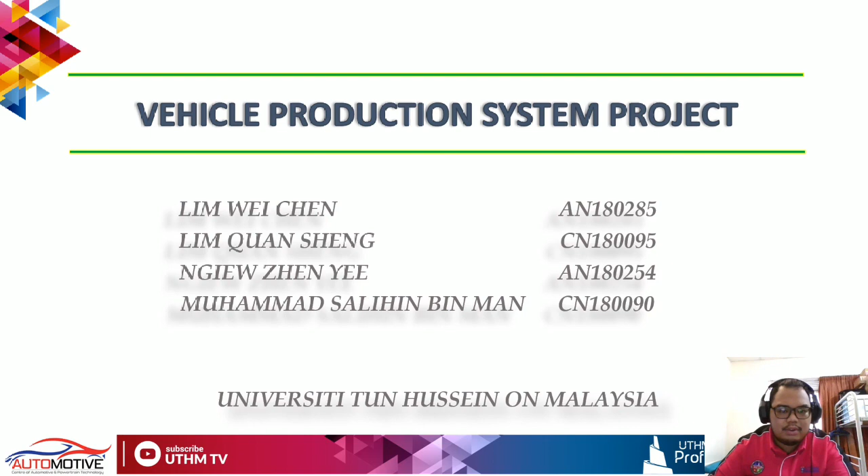The introduction for this project: in the 1960s, European firms began producing completely broken down automobiles after Malaysia won independence in 1957. The Malaysian government began industrial development for the heavy sector, notably the automobile industry, in the 1980s. European and Malaysian Chinese ethnic enterprises dominated the manufacturing sector in Malaysia.

With the New Economic Policy (NEP), which began in 1971, the government aimed to expand the entry of Bumiputra businesses into the industrial sector. Proton was founded as a partnership with a Japanese business in 1983 due to the challenge of integrating automobile production with a local company alone. HICOM contributed 70% of the total capital of 150 million, while Mitsubishi Corporation and Mitsubishi Motor contributed the remaining 30%.

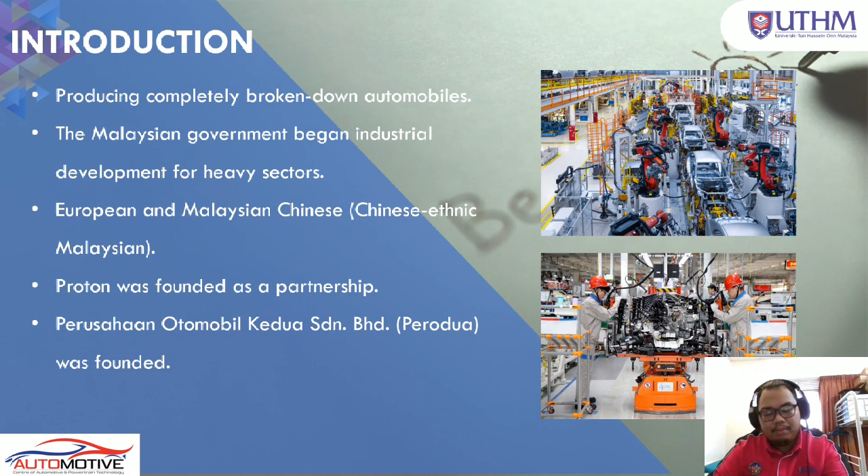Perusahaan Otomobil Kedua Sdn Bhd, or Perodua, was founded in 1993 in response to the IMP, which recommended a new national automobile project. Perodua was a collaborative effort between Daihatsu and the second national automobile manufacturer. Perodua began selling a tiny vehicle based on the Daihatsu Mira model in 1994.

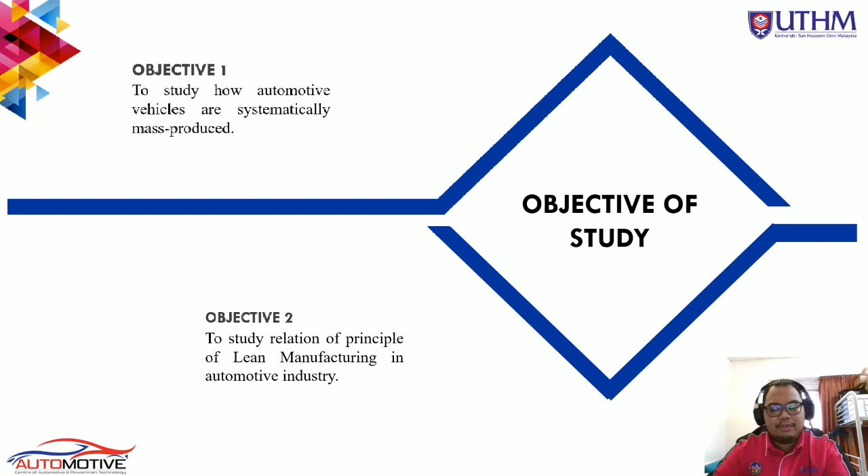The objective of this project is to study how automotive vehicles are systematically mass-produced, and the second objective is to study the relation of the principles of lean manufacturing in the automotive industry.

Next, we move to the problem statement. The importance of the automotive industry taking part in lean implementation is to implement a new management system, lean manufacturing, to improve their performance. As published by past researchers and practitioners, lean manufacturing has been implemented successfully in many large organizations, but there is still less documented evidence of how companies implement it.

The increasing demands from customers who seek high quality products and highly capable business processes has left large organizations no choice but to implement lean manufacturing to cut waste and non-added value, and to improve their quality and production time.

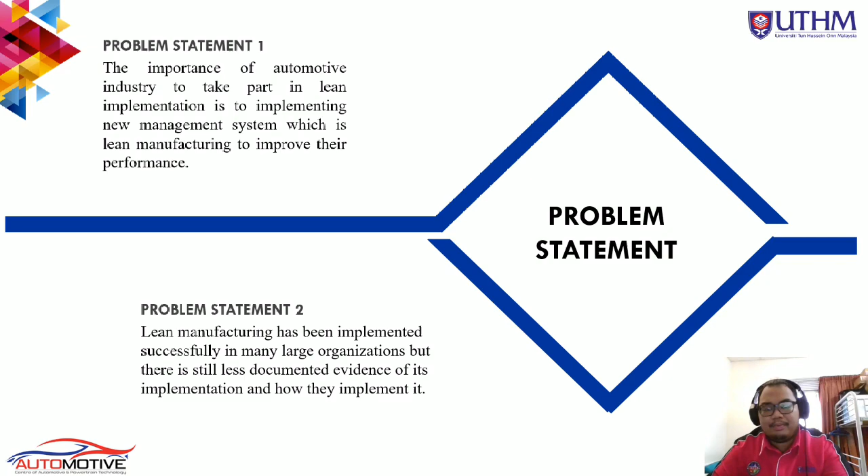In the first part of the literature review chapter, I will introduce what lean manufacturing is. The term 'lean' basically refers to a systematic method designed to minimize waste in manufacturing systems while productivity remains constant.

In the lean principles, it implies the message that waste is anything that doesn't add value that the customer is willing to pay for. Through lean manufacturing, eventually we can get benefits where we're able to reduce operating cost, reduce time, and improve product quality.

As an acknowledgement, there are several types of lean manufacturing techniques. The lean manufacturing techniques I'm going to emphasize in this presentation are Kanban, 5S techniques, Poka-yoke, SMED, TPM, and VSM. So what is Kanban?

The Kanban system is the equipment or items frequently used in the lean manufacturing system to ensure inventory is always kept to a minimum. By using the Kanban method, eventually it will bring benefits to the management, production, and the business of a company.

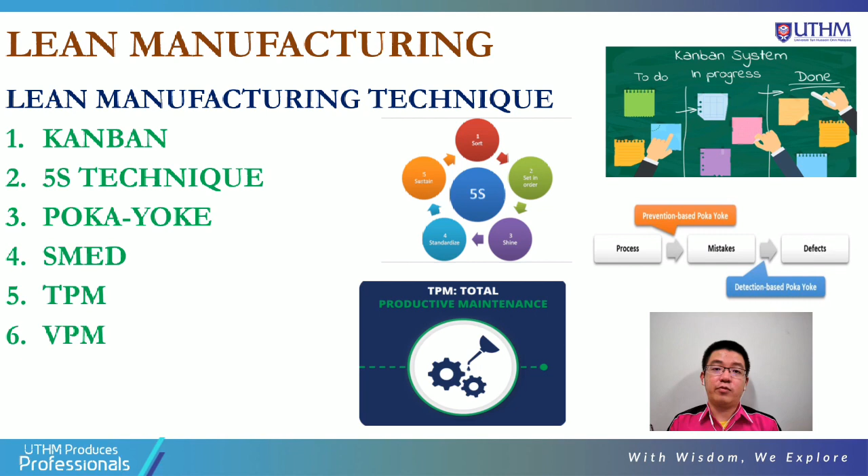One example that could be found in the automotive field which applies the lean manufacturing concept is Toyota. Toyota named it the Toyota Production System, or TPS for short. The concept of TPS is to manage the production lines and ensure production works smoothly.

The lean manufacturing techniques applied in TPS are Jidoka and Just-In-Time. Jidoka is a Japanese term which can be translated as automation with a human touch, a method to quickly identify and correct any issue that leads to faulty production.

The second one is known as just-in-time. Just-in-time refines each production process so that it only produces what is required by the next process in sequence. By applying these two lean manufacturing techniques, Jidoka and just-in-time, the vehicle production can be produced quickly and effectively, achieving a high quality product that fulfills customer requirements.

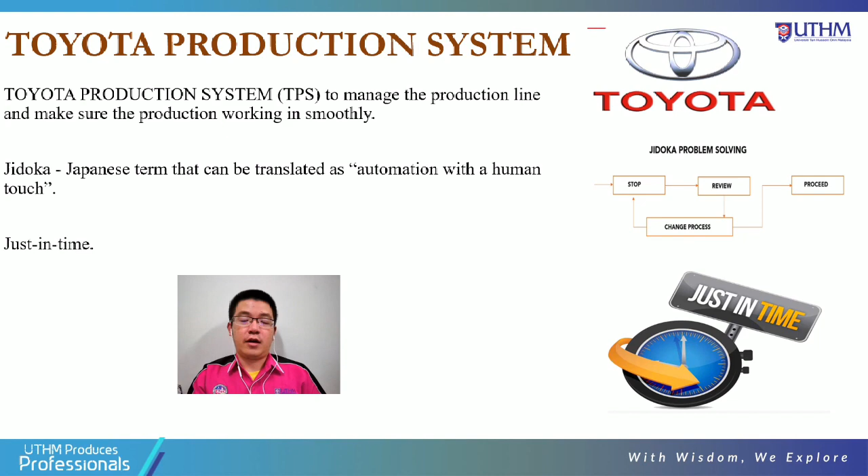First, let me start with the press shop. The press shop is where the car manufacturing process begins. It is a process where sheet metal is blanked into useful shapes through plastic deformation, using a die and a mechanical press.

The stamping engineering activities involve not just production engineering but also the development of necessary tools. Stamping engineering starts with the desired panel shape, given by the designer in a CAD file, as well as the desired panel mechanical characteristics.

Next, the engineer proceeds to material selection, which includes selecting the steel grade, thickness, and heat treatment. Following that are feasibility assessments for each material chosen, which lead to a process plan. After that, finite element simulation and numerical trials are used to create the die surface, followed by actual experimental testing.

Then, successful die designs are built and verified using various prototypes and dimensional validation techniques at the die maker facility and subsequently on the stamping line.

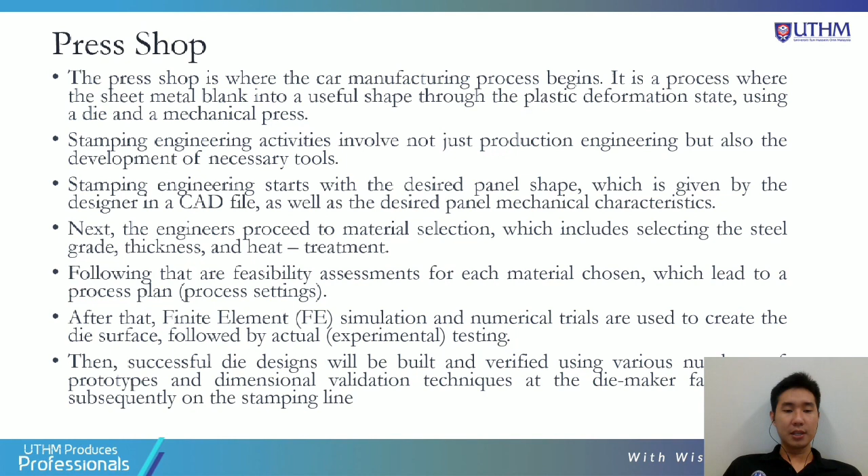The stamping process is divided into three processes. The first process is blanking, which involves a cutting action around a closed shape, the piece retained for future forming. The blank shape is composed of a number of straight and curved line segments. There are several cutting processes involved, such as slitting, shearing, piercing, lancing, trimming, and parting.

The next process is stamping or forming, which includes the first forming operation, drawing operation, and subsequent operations. The last process is the assembly activities, a variety of specialized cells for combining panels to form BiW components, such as joining the door inners and outers.

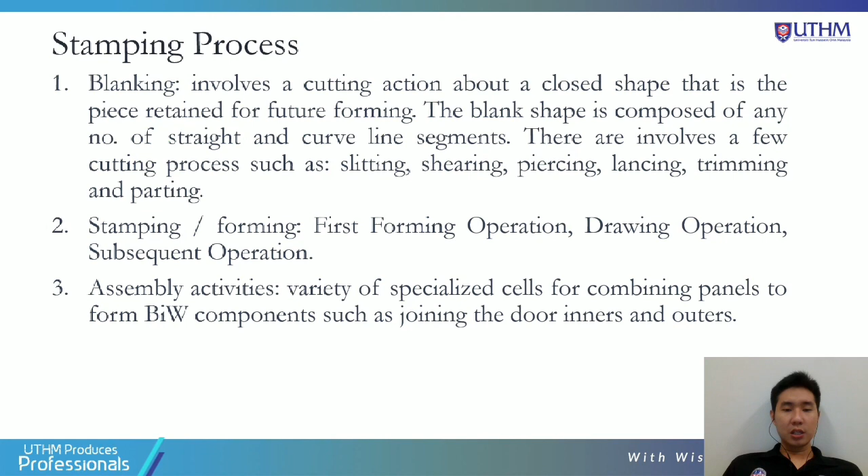For the stamping process, there are two main stamping presses. The first is the mechanical press, which works by converting the energy stored in its flywheel into a reciprocating motion that pushes the press to move through a crankshaft, eccentric shaft, or eccentric gear. The other main stamping press is the hydraulic press, which controls its force by configuring hydraulic pressure, which then moves one or more rams in a predetermined sequence.

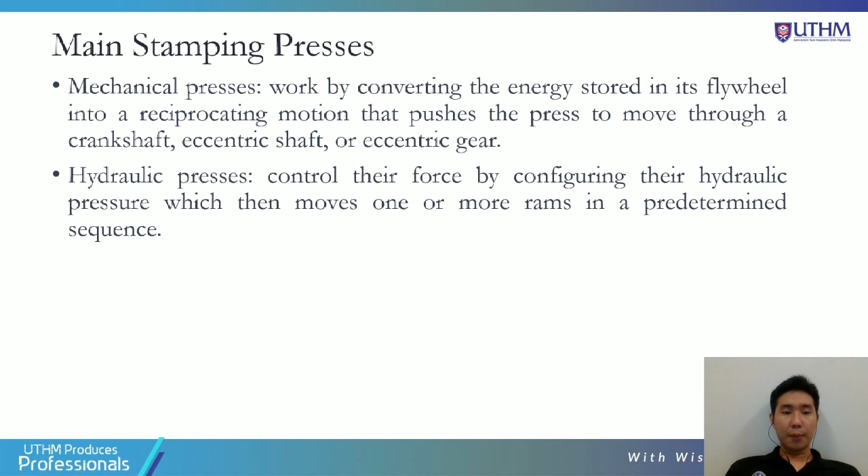Next is the body shop. The automobile body shop is the step of the manufacturing process when sheet metal panels are joined together. Welding and transportation between the various workstations of the assembly line are typical tasks in an automotive body shop.

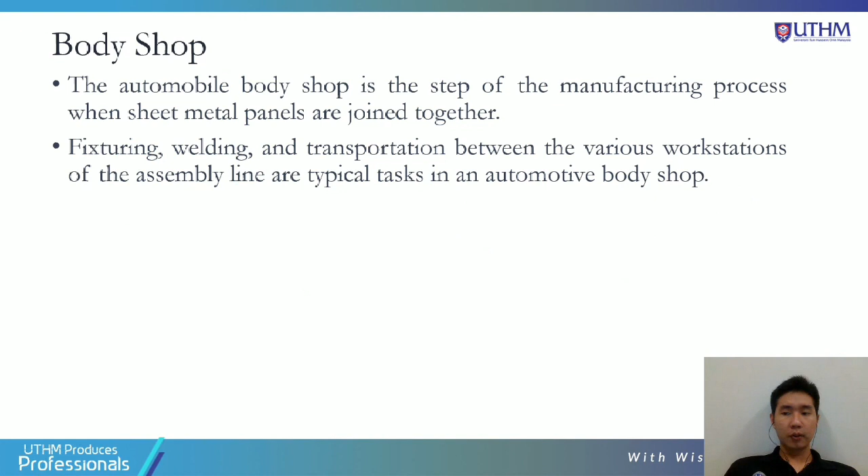Next, let me proceed to the body assembly process. A main assembly line and several sub-assembly lines make up the automotive body shop. Several hundred press blanks are transferred from the in-house stamping shop and vendor facilities to the body shop sub-assembly lines, where the panels and sub-assemblies are joined in a planned sequence at a number of stations connected by a conveyor, using resistance spot welding and other joining techniques.

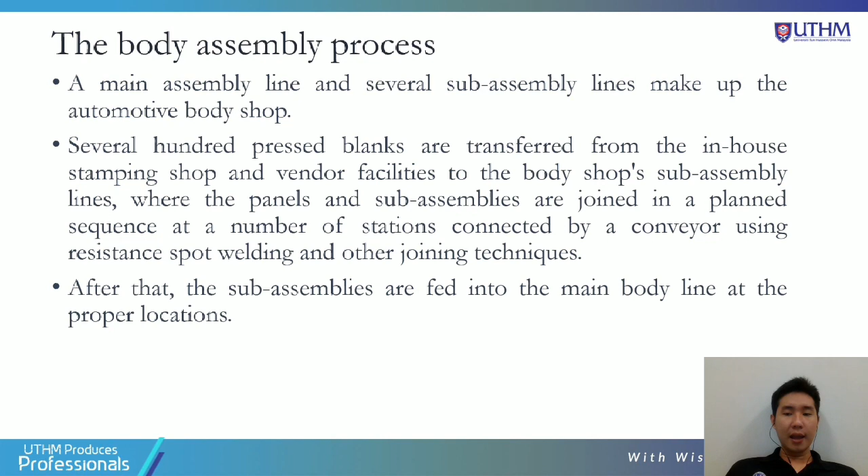After that, the sub-assemblies are fed into the main body line at the proper location. Good morning. Today I would like to present about the physical production system in the engine shop.

The engine shop is divided into several assemblies: the short block assembly, piston sub-assembly, cylinder head assembly, and final assembly. The final assembly combines the short block, the piston, and the cylinder together and undergoes final assembly.

The short block means the cylinder and all the components of the cylinder, and the piston sub-assembly means the conrod, piston ring, and so on. The cylinder head means the valve stem and the valve spring.

Why do we need to do assembly in mass production? The advantage is increased efficiency. Besides that, it also increases productivity, and mass production can produce a large amount of engines, which cannot be achieved by the one man one craft method.

For example, the one man one craft concept is used by Mercedes for performance models, like the A45 series, which means one engine is built together by one technician. For mass production, the engine is installed using robotics instead.

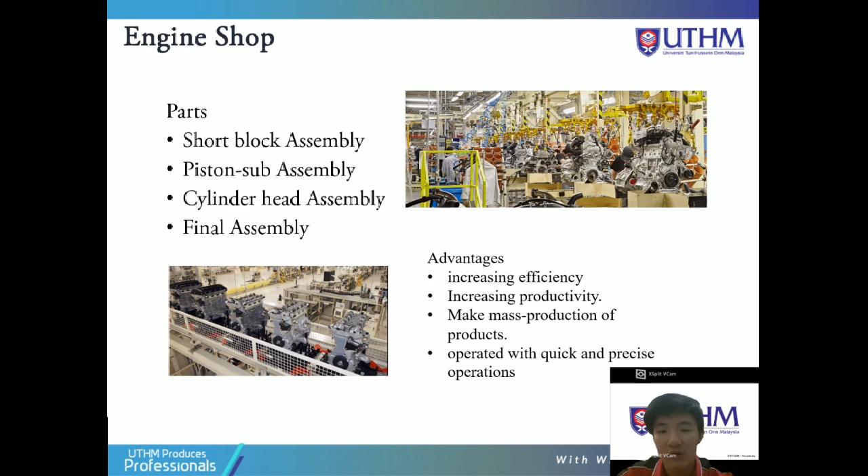Okay, next is the material and method of the cylinder block. As we know, the cylinder block uses a lot of materials, which means cast iron, aluminium alloys, and the latest one is magnesium alloy.

Okay, for the method of generating a cylinder block, we use three concepts: sand mould, lost foam casting, and green mould. For the green mould, similar to die casting, it melts the metal at high temperature and pours it into the sand cast to become the shape of the cylinder. For lost foam casting, you pour the high temperature molten metal into the mold and it becomes the shape.

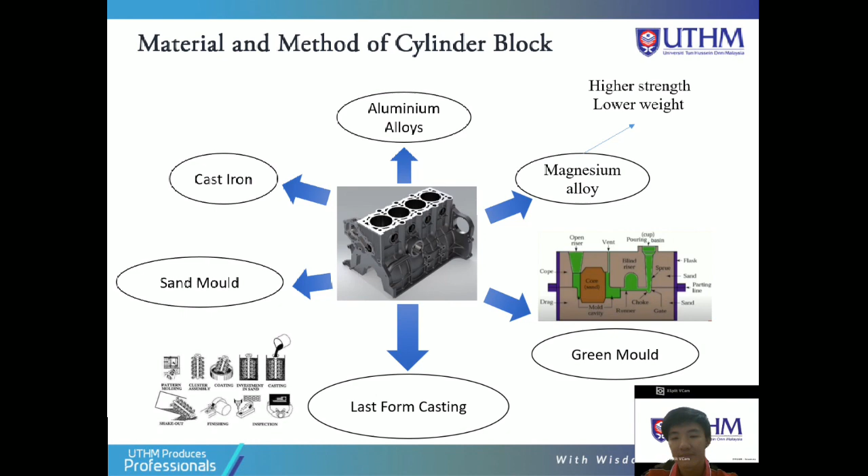Okay, I want to explain the flow chart of the paint shop. If the car is received from the welding shop, it has a lot of lubricants and dirt. So first of all, you want to degrease and clean the surface, removing the lubricants and chemical coating.

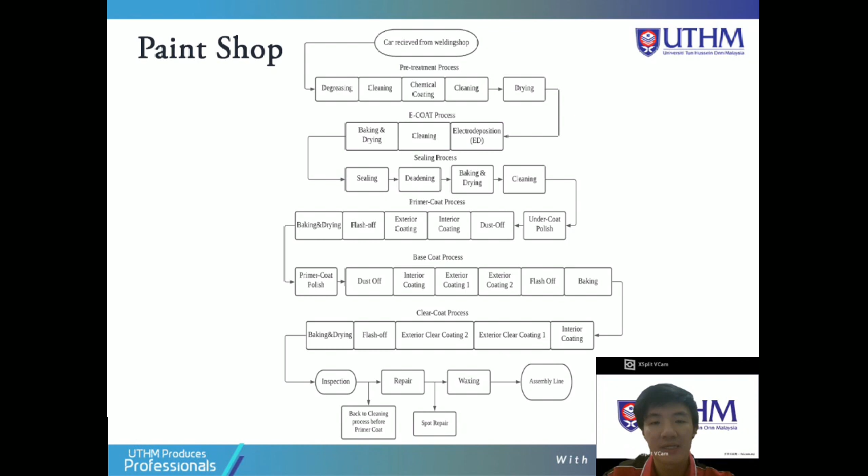Okay, so we'll go to the coating process. First the BIW, body in white, arrives from the body shop. It will undergo two processes, which means the pre-treatment. The pre-treatment helps promote paint adhesion initially, reduces the metal to paint reaction, and next, improves corrosion resistance.

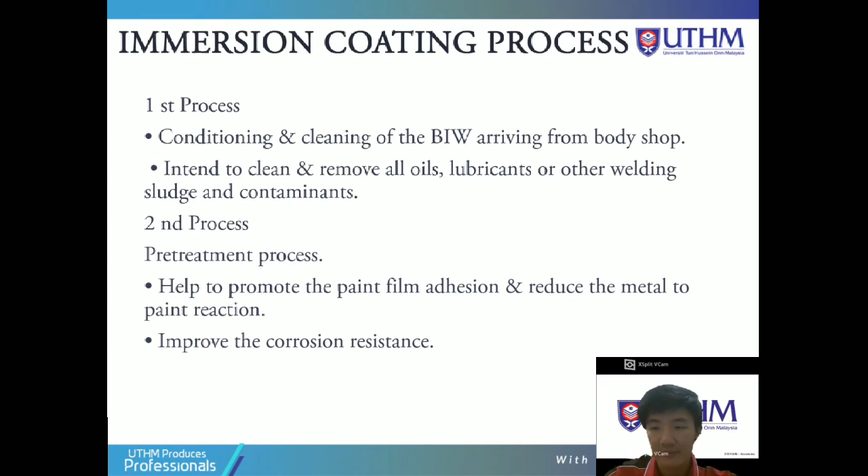The second one is spray cleaning, which is mainly for small components. Dip cleaning targets things like the subframe and cross member, meaning the heavier components. Spray cleaning is for small components, meaning the door panel or bonnet.

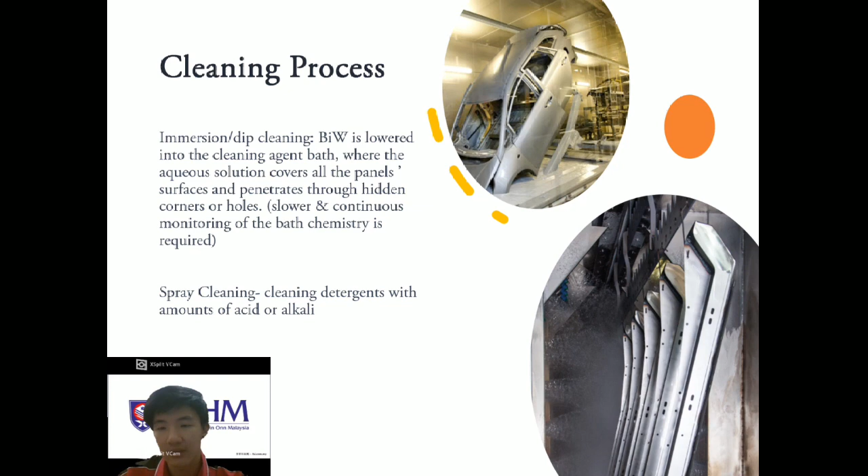In the cleaning process we have several steps: it will undergo the wetting process, then emulsification, and saponification. The last one is the deflocculation phase. This is the cleaning process.

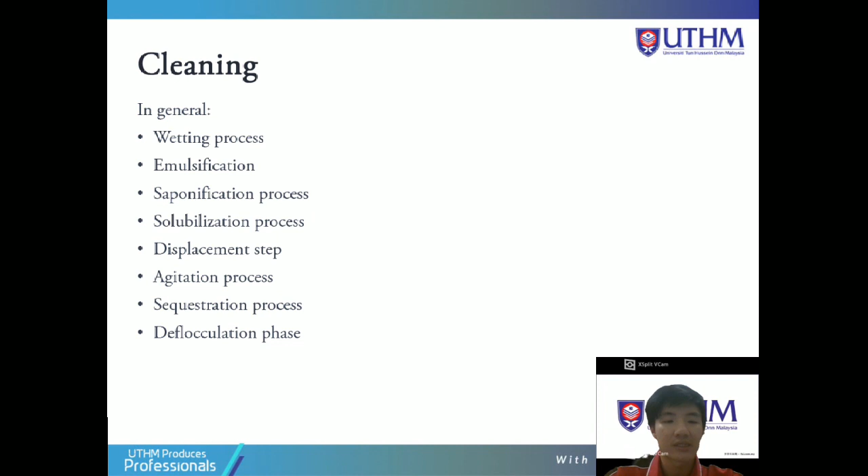Okay, as we know, after the pre-treatment, we undergo e-coating. The advantage of e-coating is it's a fast process, which means e-coating can provide a consistent paint subsequent film, such as e-coating being a primer coat with primer paints.

Next, e-coating has no HAP or volatile organic compounds, which means e-coating is neutral in compounds and doesn't have anything harmful for materials and metals.

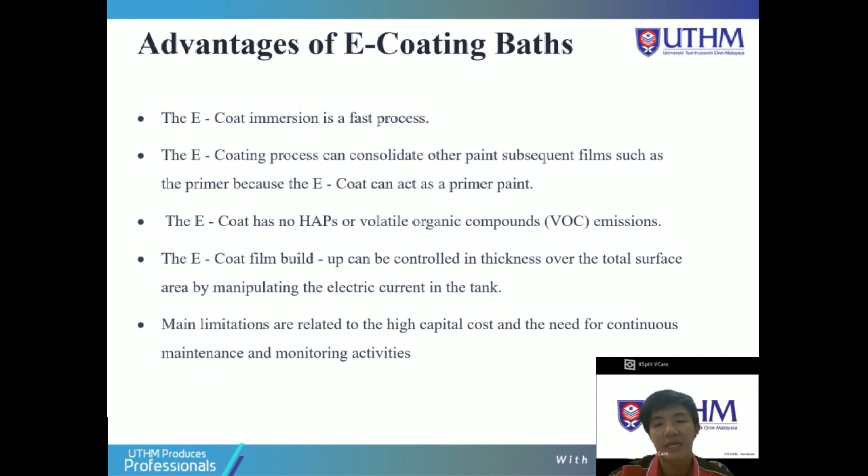Next, e-coat can build up with controlled thickness on the surface, meaning you can adjust the thickness of the surface. The next point is the limitations, related to high capital cost and the need for continuous maintenance or monitoring activity. Okay, the next one is the types of coats.

In the coats we have divided several types, which means clear coat, e-coat (just mentioned), prime coat, and top coat. Each has its function. The clear coat protects the car from external elements, meaning dirt, sand, or snow.

It's specifically used in four-wheel drive vehicles, because targetly the four-wheel drive truck will undergo conditions of dirt. The e-coat will provide a car body with a primer coat for corrosion protection.

Okay, next is our prime coat. The prime coat has a lot of functions, meaning it can provide a sound foundation for the top coat, which is the fundamental layer beneath the top coats.

Okay, next, it can protect against rusting and fill tiny scratches or flaws in the panel. The prime coat can also be applied on surfaces with whole repair areas.

And next, the prime coat is usually targeted for OEM paint areas, meaning the manufacturer can use it. Normally, the manufacturer can apply those coats together, meaning it can have several coats.

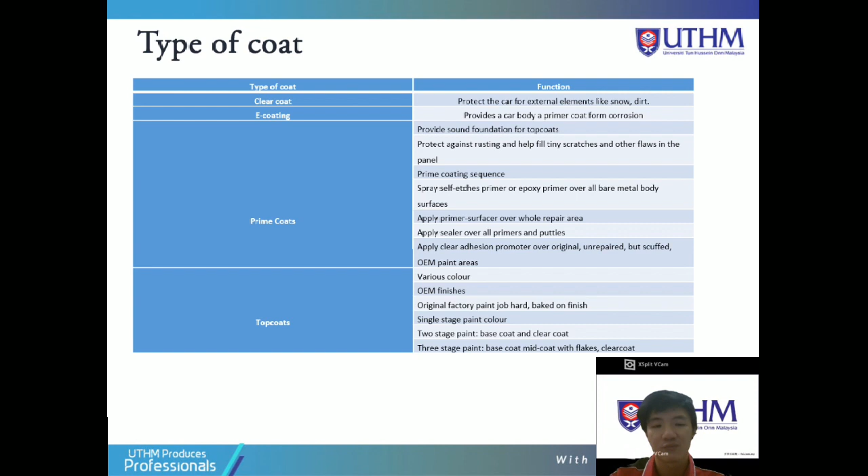This is the automotive spray booth. As you can see in the spray booth now, we don't use any mechanical means, which means we use workers to spray the frame for the cars, right? Because using mechanical equipment wastes a lot of time and costs a lot.

So the industry is undergoing a transition to an automatic system for robotic painting.

Also, you can see the next diagram is the schematic diagram for the paint booth condition, which means they have the velocity of the airflow, which helps the paint stick to the vehicle and reduces overspray behind.

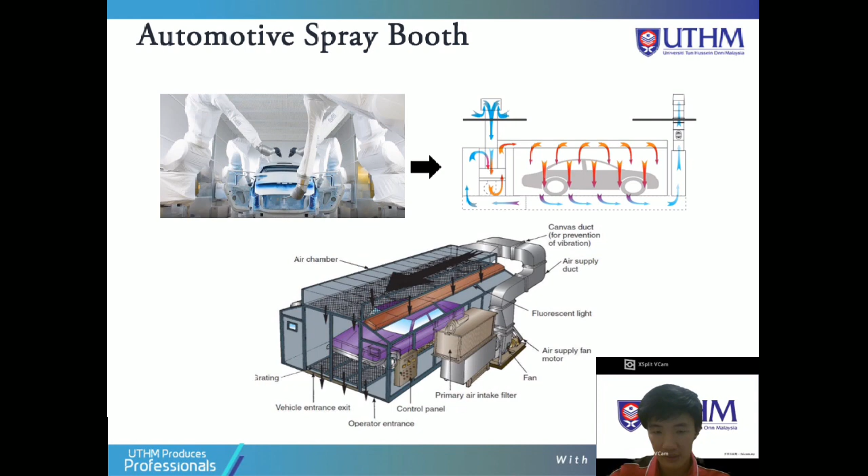So the next one is the diagram of the whole spray booth. You can see it has air supply fan motors to provide and recycle the air containing the paint. The next one is the primary air intake filter and so on.

As we know, for automatic robotic painting, you'd consider it wastes a lot of paint, but the industry has invented a technology which is like a magnet concept. The paint has a negative magnetic charge, and the physical frame provides a positive charge, so they attract each other and stick together.

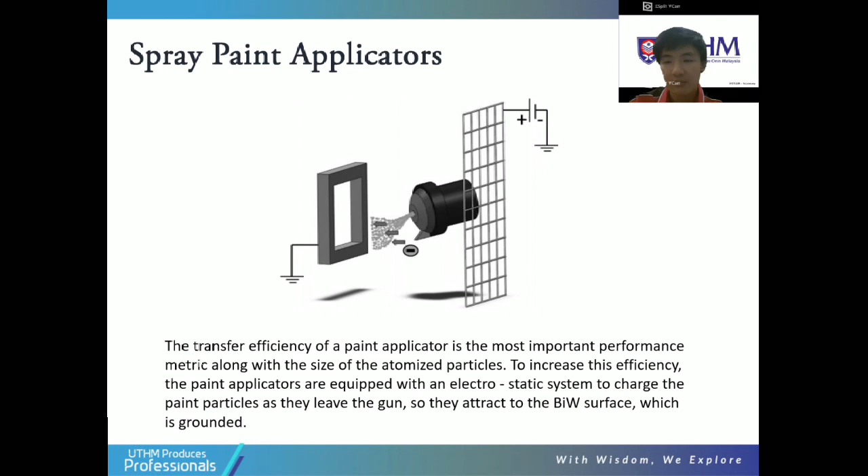Okay, now we're going to our assembly shop. Before we proceed, as we know, the stamping process, the press process, the paint shop, and the engine shop have been completed. So we want to combine everything to become a vehicle.

In this assembly shop, we conduct the flow process, which includes the trim line assembly, chassis assembly, final assembly, and we also conduct a testing area.

In our trim line, it provides convenience for the whole process until the final assembly, making it more convenient for humans to assemble the parts.

In the production line, we use an AGV, which means automated guided vehicle, to install the door panel. In the trim line, it will install the harness, which includes the shock absorber, the wiper, and electronic items like the pedal.

After we finish the trim line, we go into the chassis line. The chassis will be combined together with the frame.

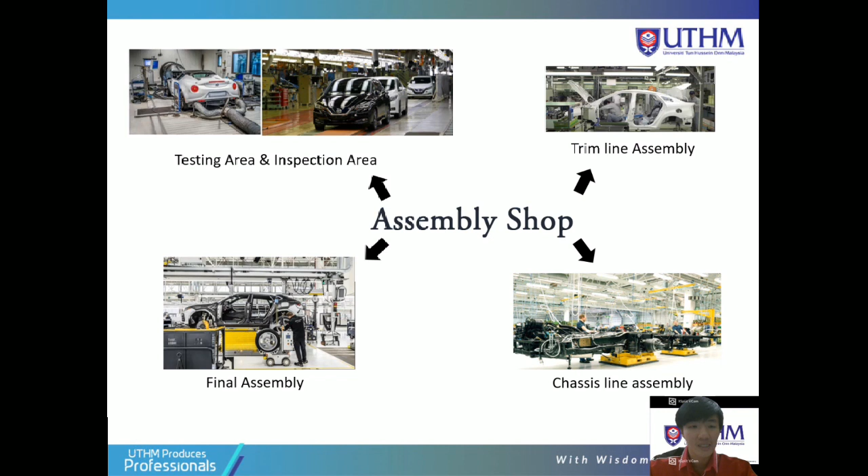So next, we proceed to the testing area. The testing area is for testing the vehicle.

Next, we move on to quality control. In the quality control process, it determines the quality of the vehicle produced by the manufacturer.

The first step is engine development. This process involves testing the engine, such as engine torque and so on, to determine how long it can run and its durability.

The next one is the vehicle test. In the vehicle test, staff drive on road conditions to test road cornering and stability, which means suspension testing.

The next one is the exhaust emission testing. This involves using an exhaust analyzer, running the vehicle on a dyno to test exhaust emissions, to determine how much air pollution is produced, since we want to reduce carbon monoxide.

According to the regulations in Asia, the next one is the brake testing. The brake testing tests the brakes for resistance to reduce emergency risks.

The last one is the transmission testing. Transmission testing checks how the gears change and helps reduce problems for the aftermarket.

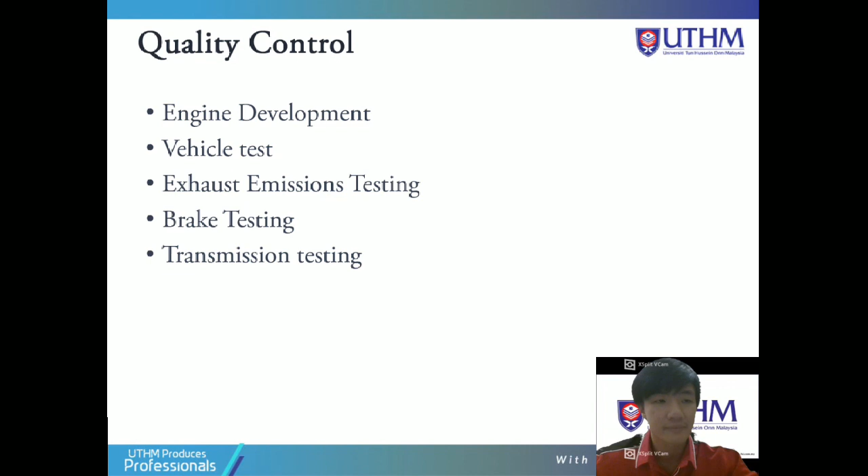Next, let me proceed to the conclusion part. In the automotive industry, the typical structure of a plant for car manufacturing involves five main production stages: press shop, body shop, engine shop, paint shop, and assembly shop.

In the body shop area, the stamped parts are assembled into panels in several assembly lines before the body in white is assembled in the main line. The complete body in white is then transferred to the paint shop. In the paint shop, the body in white surface is first prepped and then lacquered.

In the engine shop, all the components like crankshaft, piston, and etc. are assembled together. In the assembly shop, the interior and exterior trims and the engine are installed.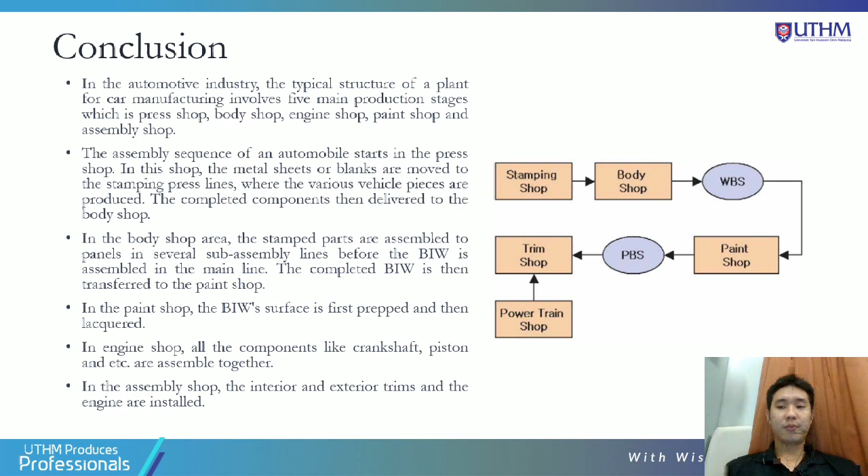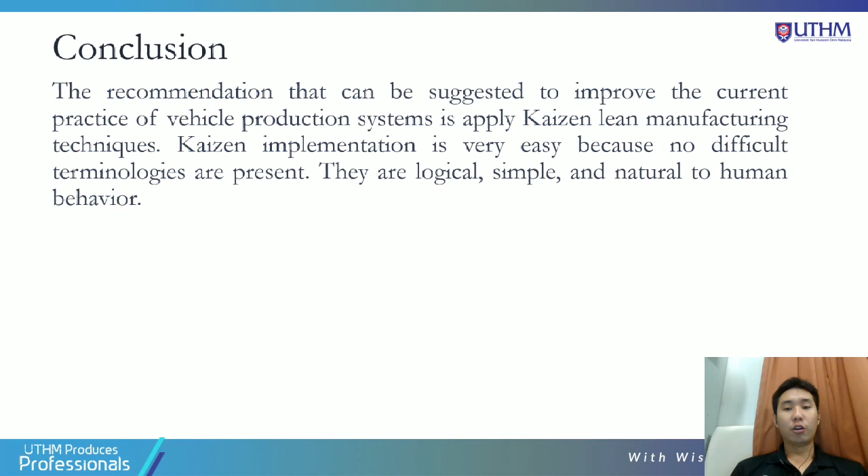Next, the recommendation to improve the current practice of the vehicle production system is to apply Kaizen lean manufacturing techniques. Kaizen implementation is very easy because no difficult terminologies are present, they are logical, simple, and natural to human behavior.